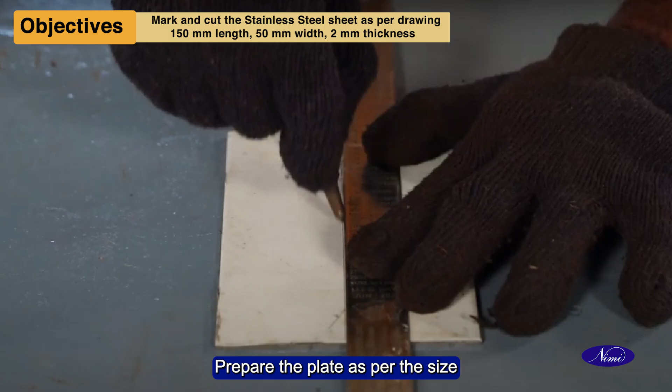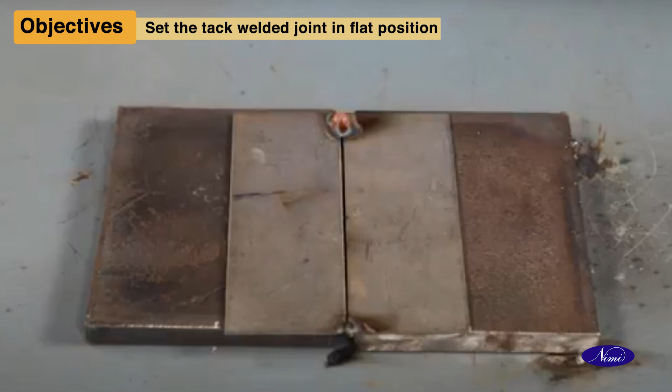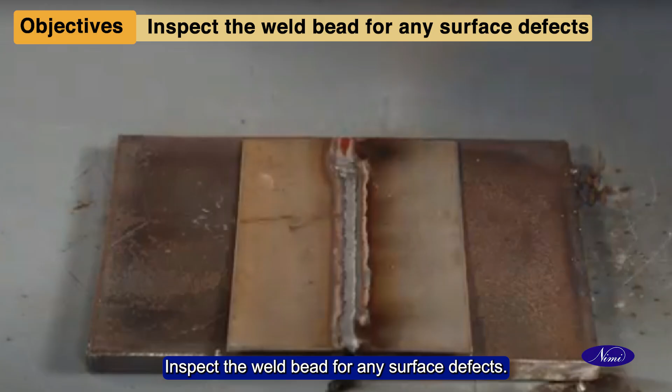At the end of this topic, you shall be able to prepare the plate as per the size 150 mm length, 50 mm width and 2 mm thickness. Set the tack welded joint in flat position. Deposit the bead with appropriate amount of filler metal. Clean the weld bead with a steel wire brush. Inspect the weld bead for any surface defects.

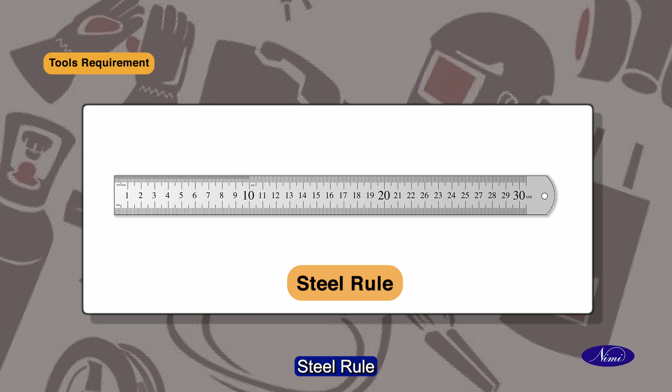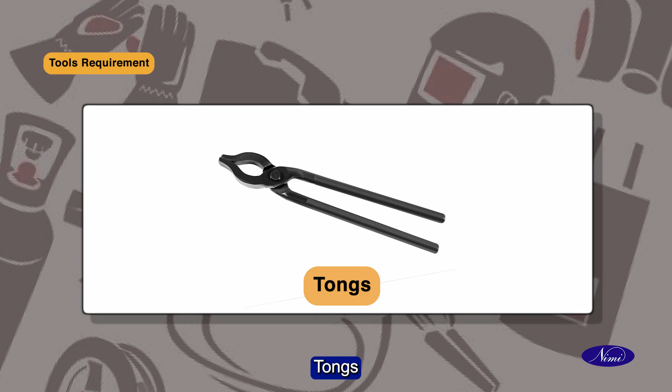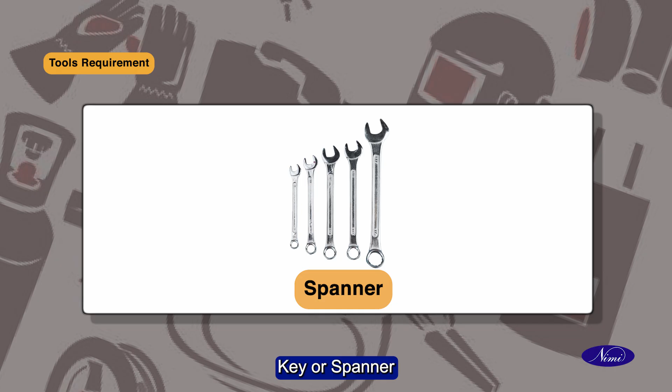Now let us look at the tools required for performing butt joint on stainless steel 2 mm thick sheet in flat position by dip transfer. Tools or materials required: steel rule, ball peen hammer, half round file, tri-square, tongs, chipping hammer, steel wire brush, personal safety equipment, key or spanner, helmet type screen, angle grinder, gas regulator

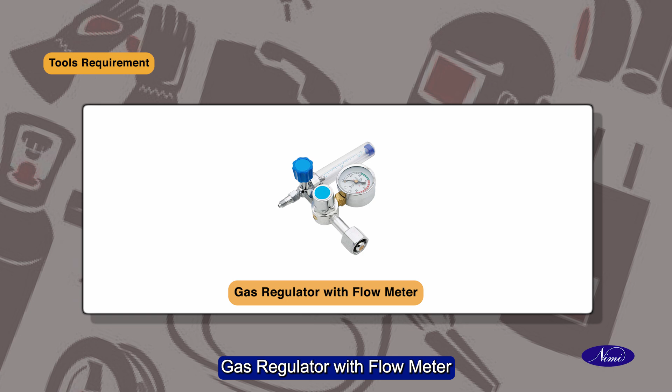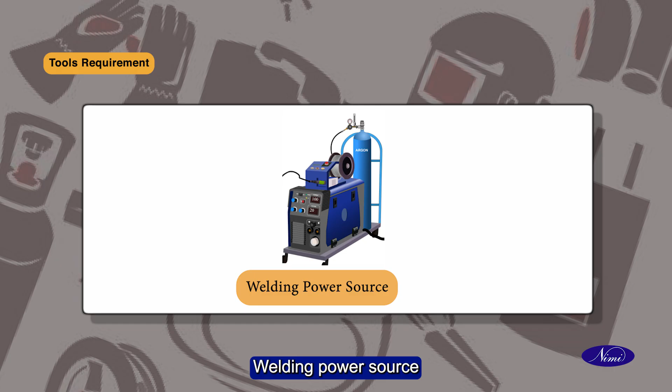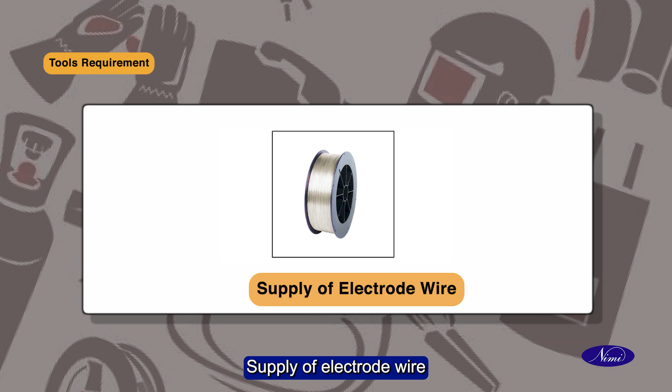with flow meter, CO2 gas heater, shielding gas hoses, welding power source, wire feeders, supply of electrode wire, welding gun, shielding gas cylinder, argon gas, stainless steel sheet 2 mm thickness.

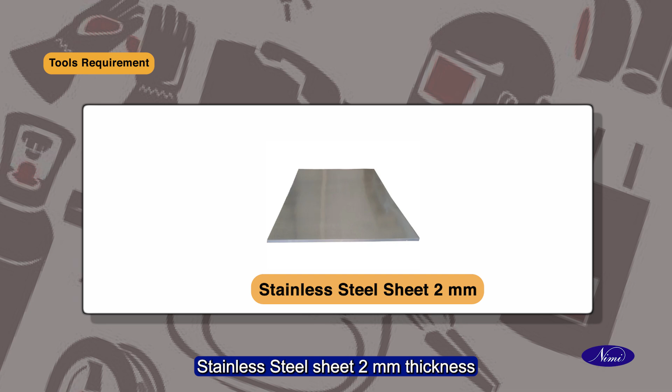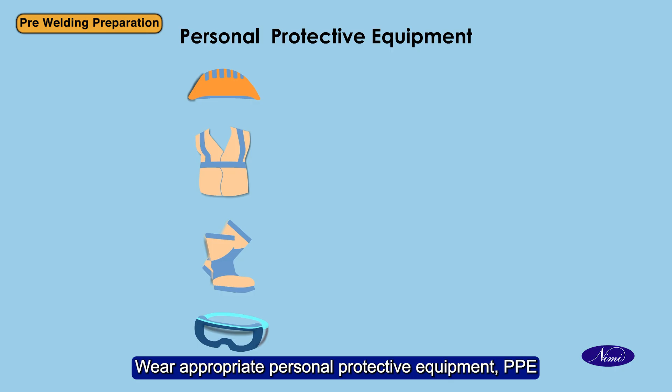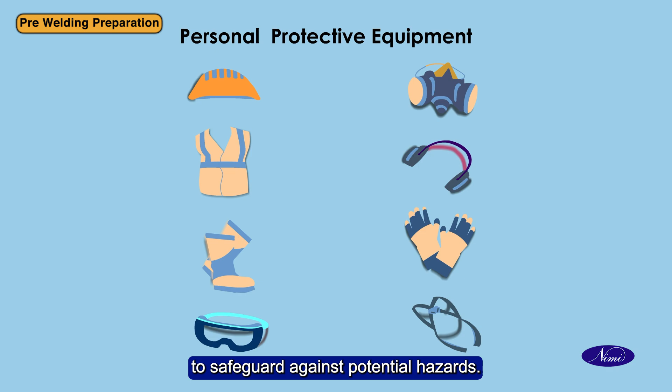Now let us look at the preparations for performing butt joint on stainless steel 2 mm thick sheet in flat position by dip transfer. Pre-welding preparation: wear appropriate personal protective equipment (PPE) such as safety goggles, gloves and ear protection to safeguard against potential hazards. Make sure you work in a place with good light and ventilation.

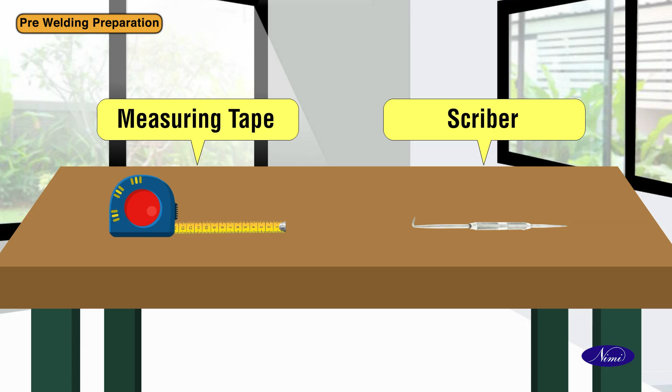Keep ready with ruler or measuring tape and scriber on the welding table for taking measurement for cutting. Use a ruler or measuring tape to mark the desired cutting line, 150 mm length, 50 mm width, accurately on the stainless steel sheet 2 mm thick.

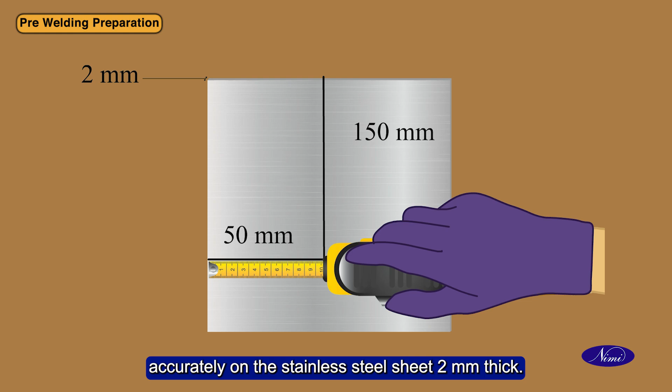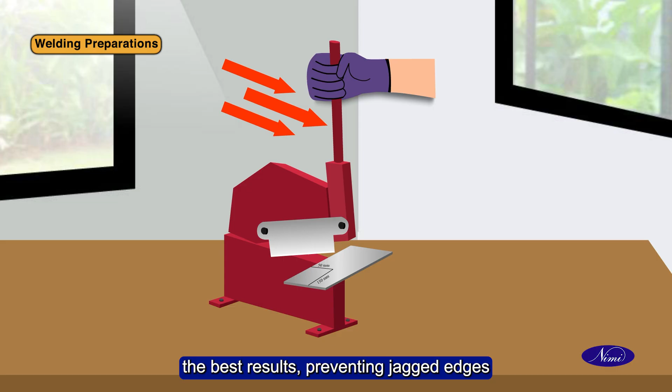Keep the hand shearing machine aligned with the marked cutting line as you continue to apply pressure. A slow and controlled cutting motion will yield the best results, preventing jagged edges and deformation of the sheet. Once the cutting process is nearing completion, pay extra attention to maintain the straightness of the cut.

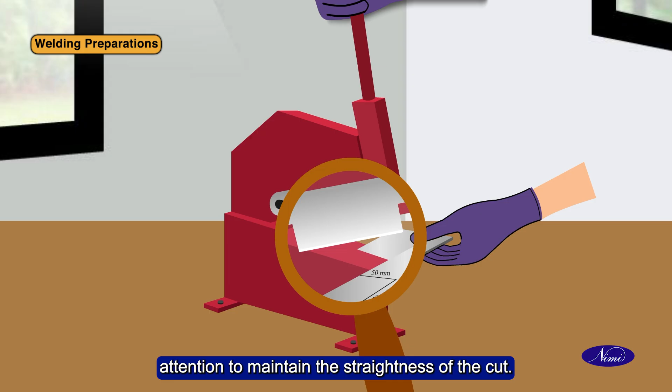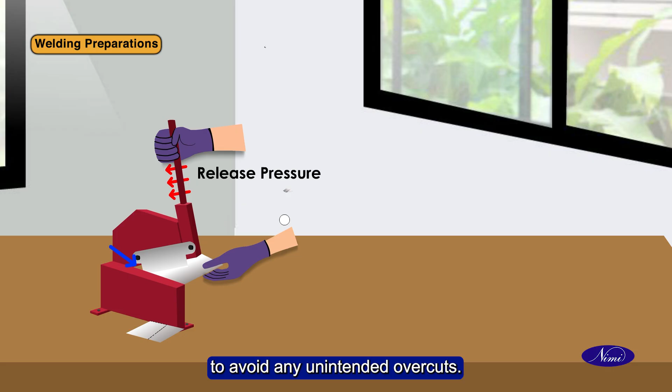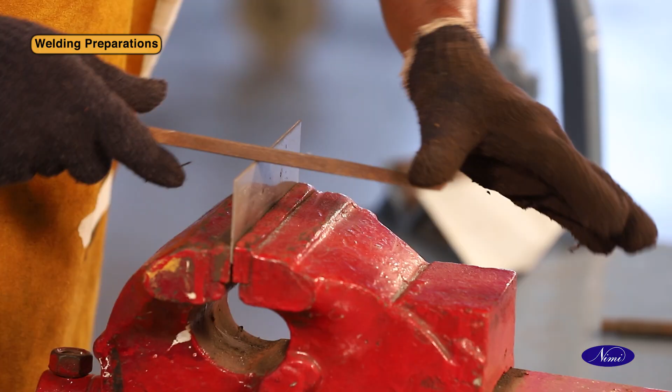Slow down as you approach the end of the line to avoid any unintended overcuts. After the cut is finished, carefully examine the edges of the stainless steel sheet. File the rough edges. Clean the job surface with a stainless steel wire brush.

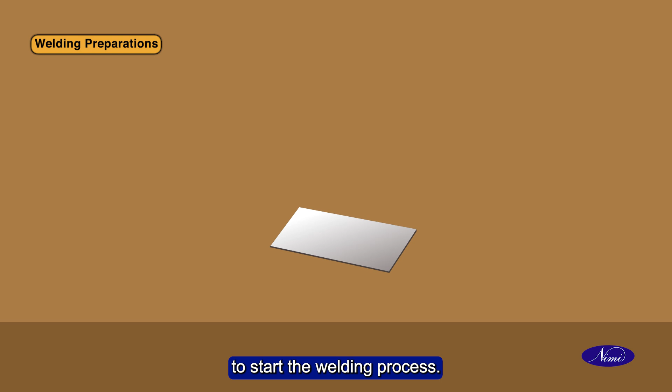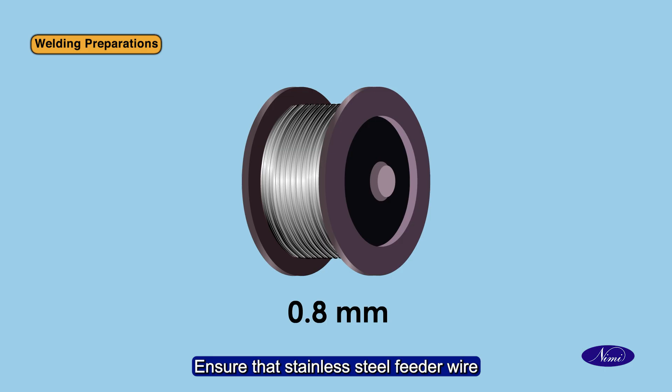Keep the sheet ready on the welding table to start the welding process. Start setting up of GMAW machine. Ensure that stainless steel feeder wire with correct diameter is taken.

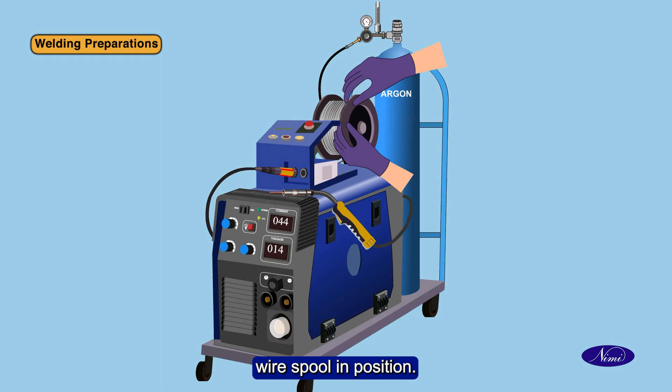Fix the 0.8 mm diameter stainless steel wire spool in position. Lock it up and pull the wire through the guide tube, rollers, spiral and contact tip of the torch. Ensure that argon gas cylinder is fitted with flow meter.

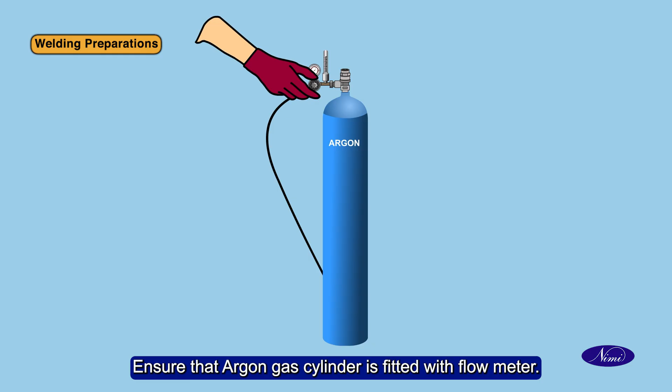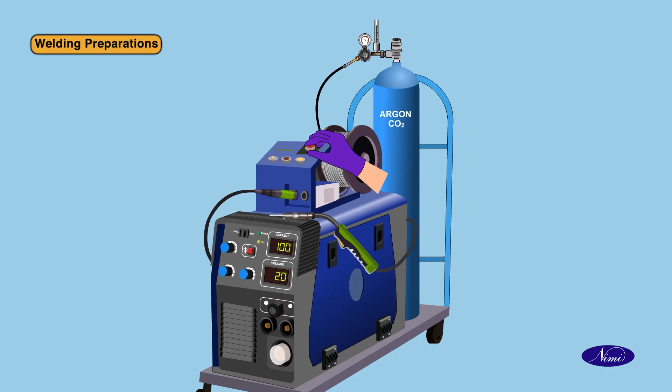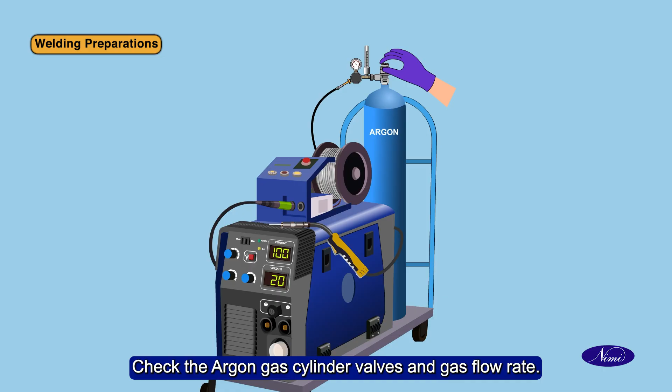Check the machine setup before starting the welding. First, check the power supply of the GMAW machine. Check the argon gas cylinder valve and gas flow rate. Check the feeder wire machine for the correct speed.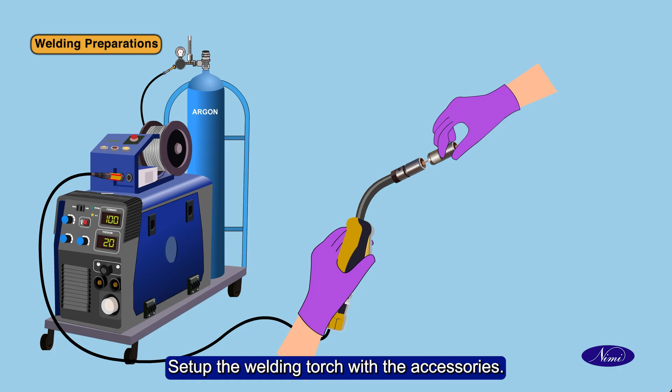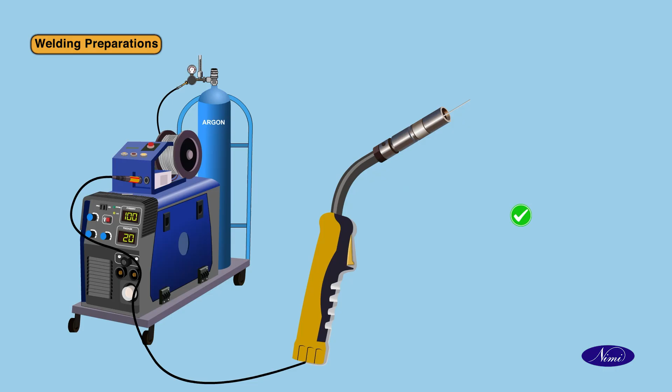Set up the welding torch with the accessories. Check the filler wire feeder on the welding torch. Ensure that the GMAW machine is working fine.

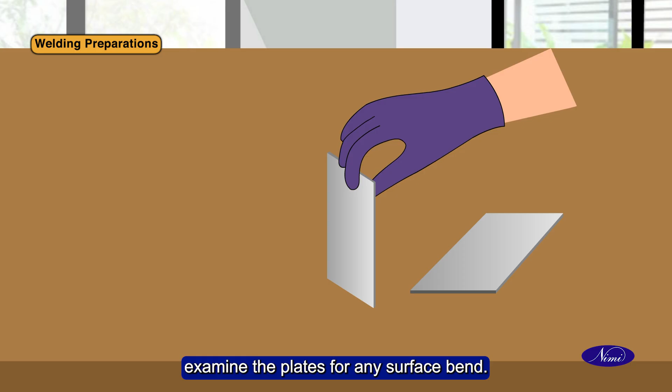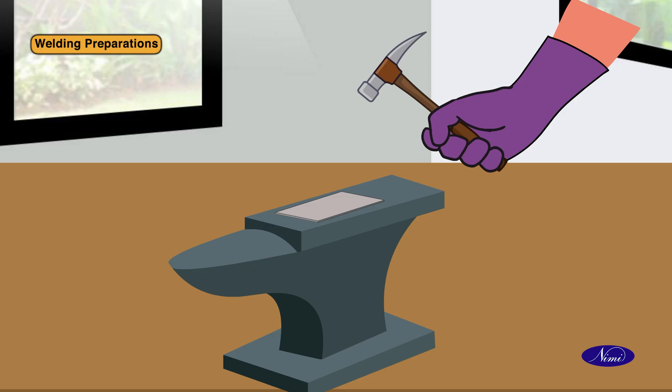Before setting sheets as square butt joint, examine the plates for any surface bend. If any bend is observed, then straighten the cut pieces by hammering on an anvil. Once again, check the surface and proceed for the setting process.

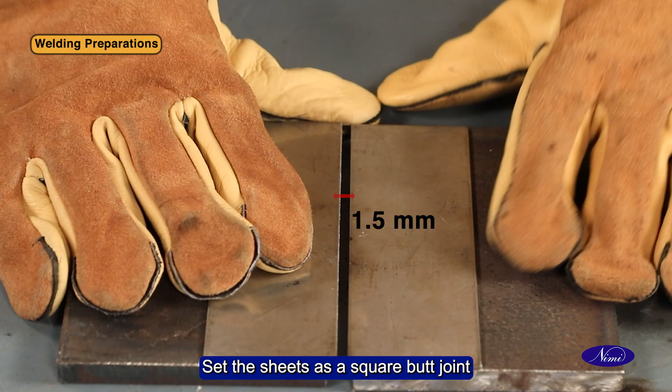Set the sheets as a square butt joint with 1.5 mm root gap. Tack weld the sheets at either end of the sheet.

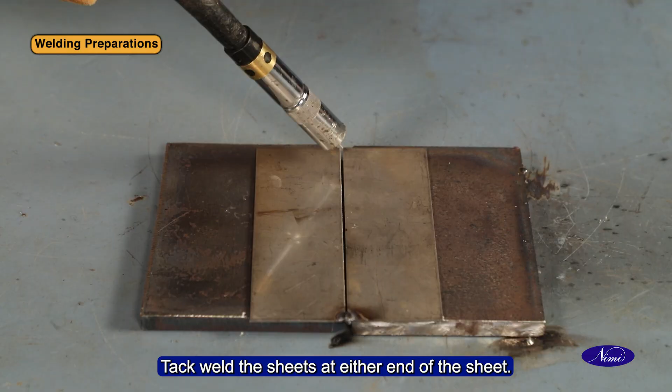Now let us see the welding process for performing butt joint on stainless steel 2 mm thick sheet in flat position by dip transfer.

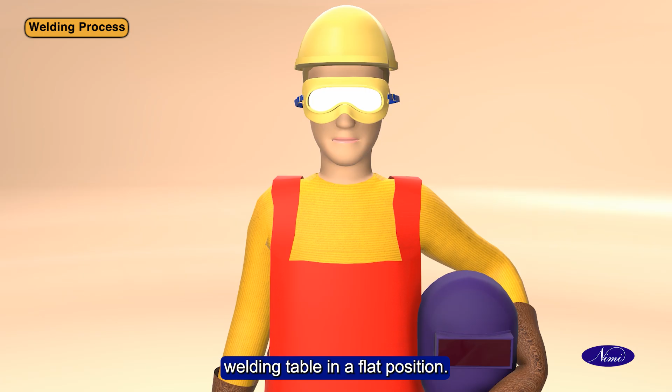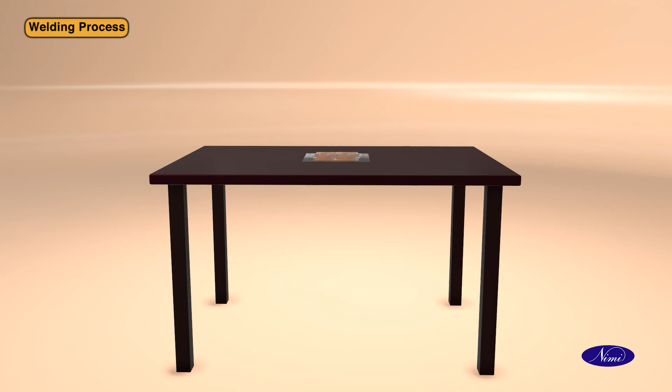Wear appropriate personal protective equipment (PPE) such as safety goggles, gloves, and ear protection to safeguard against potential hazards. Set the tack welded workpiece on the welding table in a flat position. Fix the tack welded workpiece on the backing strip in a flat position.

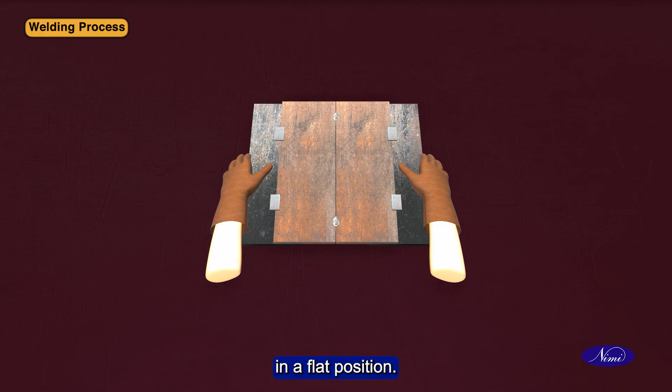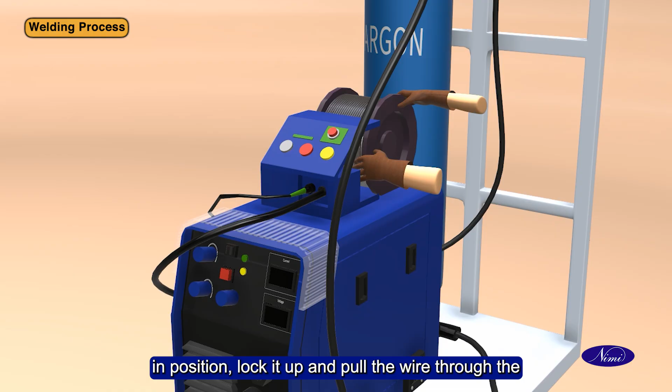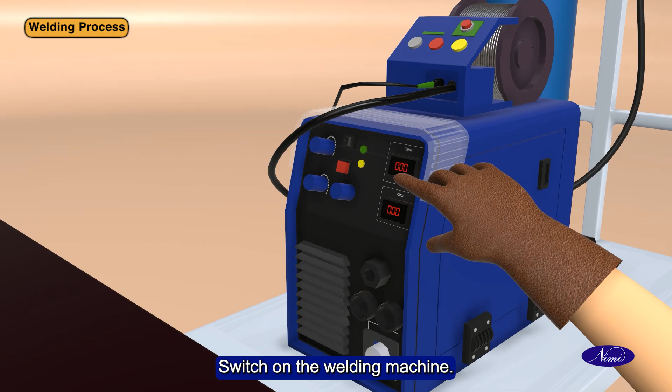Fix the 0.8 mm diameter stainless steel wire spool in position, lock it up and pull the wire through the guide tube, rollers, spiral and contact tip of the torch. Switch on the welding machine.

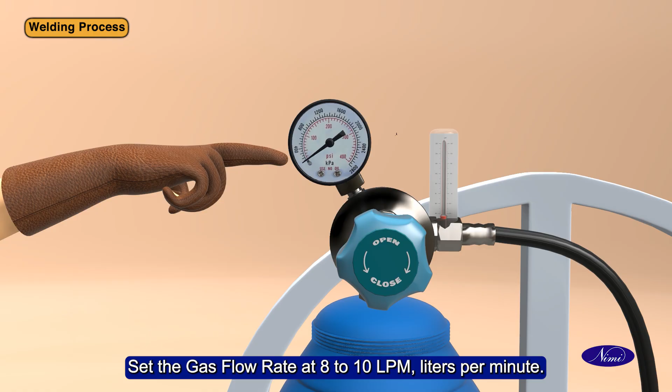First, check gas flow while starting the welding. Adjust the gas flow according to the specified flow rate. Set the gas flow rate at 8 to 10 lpm, liters per minute.

See the flow rate in the flow rate tube next to the opening valve of the cylinder. Ensure that the flow rate is correctly set for the welding process.

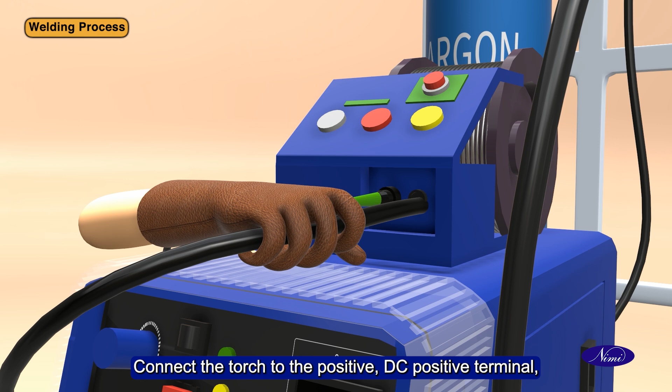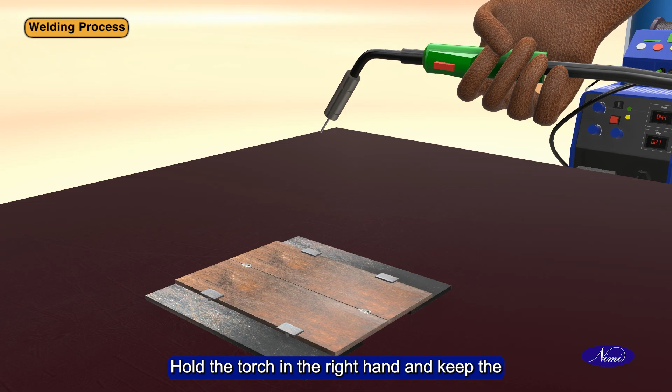Connect the torch to the positive, DC positive terminal (DCRP) of the machine. Keep the welding torch in the ready position. Hold the torch in the right hand and keep the index finger on the press button of the welding torch.

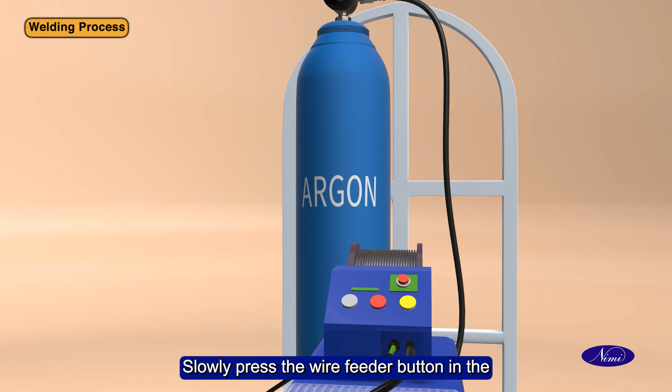Slowly press the wire feeder button in the welding torch and check if the wire is coming out at a constant speed.

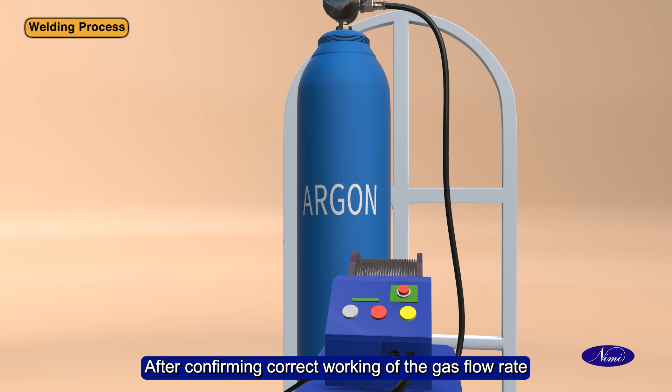After confirming correct working of the gas flow rate and wire feeder rate of the machine, we have to start setting the voltage for the welding process.

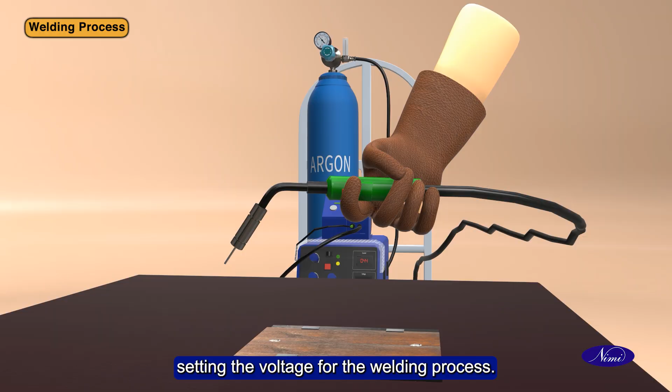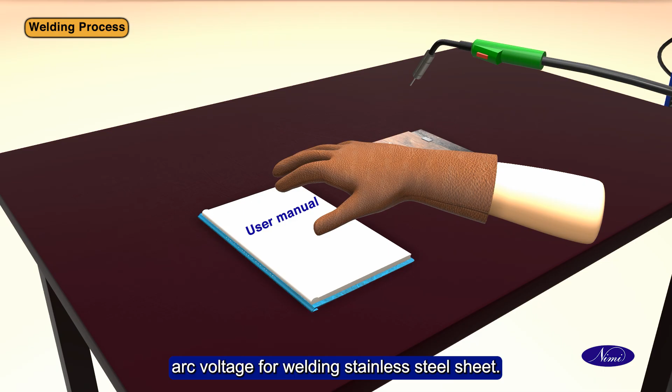Before setting the arc voltage, it is better to see the guidelines or user manual for setting arc voltage for welding stainless steel sheet. Same procedure is to be followed for setting the ampere. See the guidelines or user manual for setting ampere for welding stainless steel sheet.

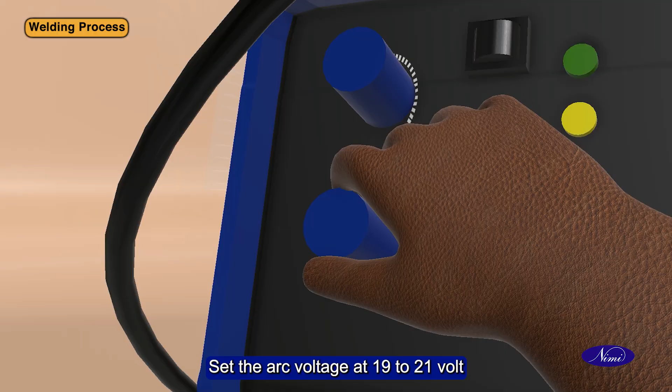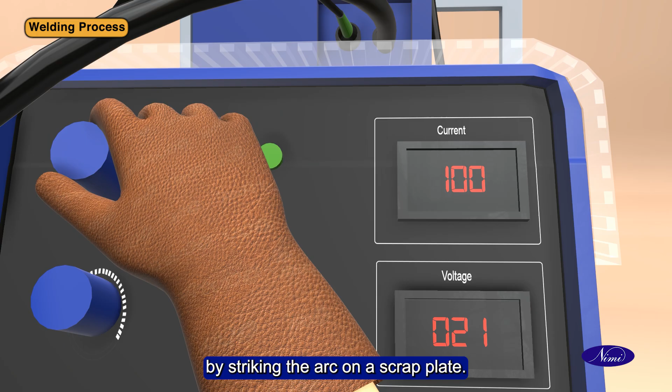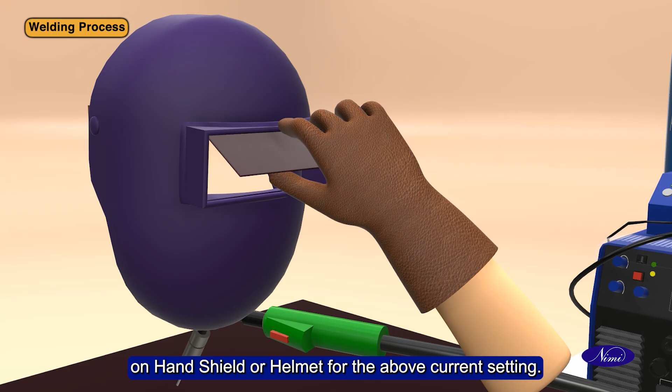Set the arc voltage at 19 to 21 volts as required for dip transfer mode. Set the wire feed rate so as to get 90 to 100 ampere by striking the arc on a scrap plate. Use DIN 11 or 12 black or green filter glass on hand shield or helmet for the above current setting.

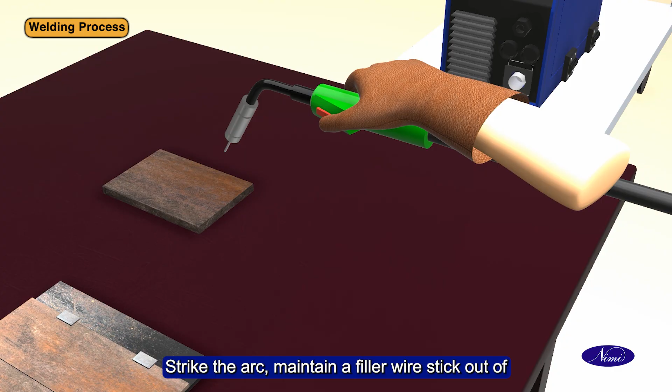Switch over to weld mode as indicated in the machine. Strike the arc, maintain a filler wire stick out of 8 to 10 mm from the end of the contact tip to the job as required for dip transfer mode.

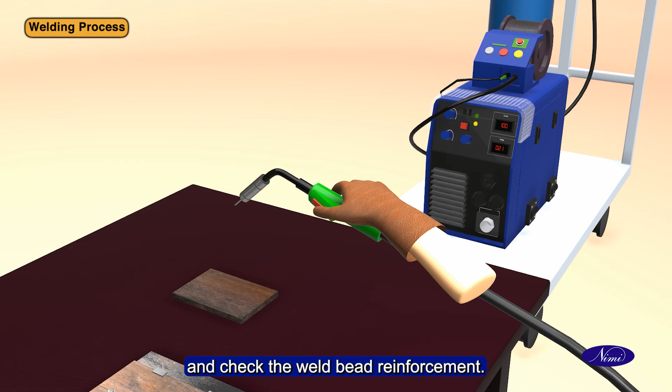Strike an arc on a sample sheet and check the weld bead reinforcement. Use proper torch angles with slight weaving motion. Deposit the bead on butt joint from one end to the other end.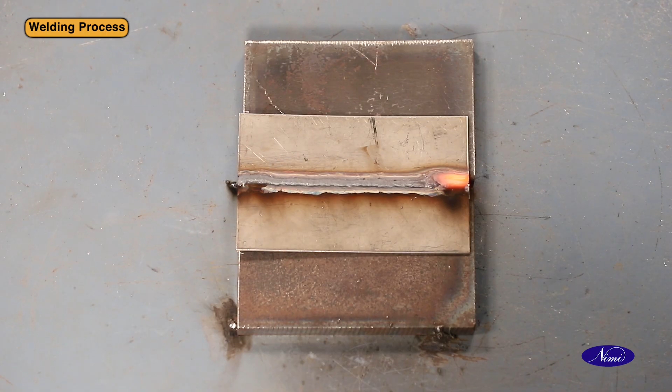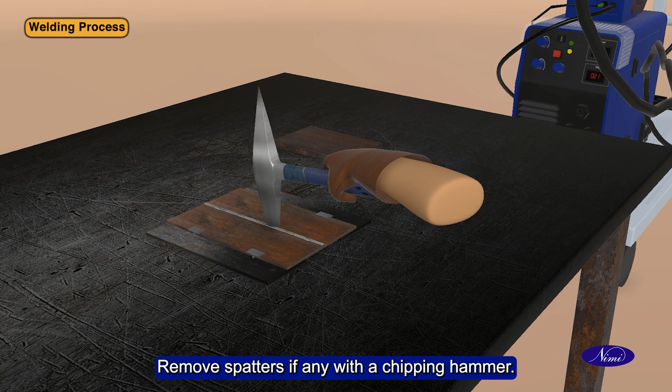Ensure for proper reinforcement of the weld bead. Remove spatters, if any, with a chipping hammer. Clean the joint using carbon steel wire brush. Inspect the weld bead for any surface defects.

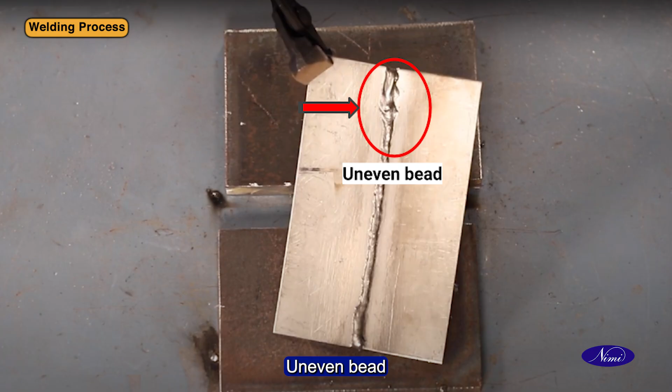Let us now see the defects: uneven bead, excess reinforcement, spatters, improper fusion, distortion.

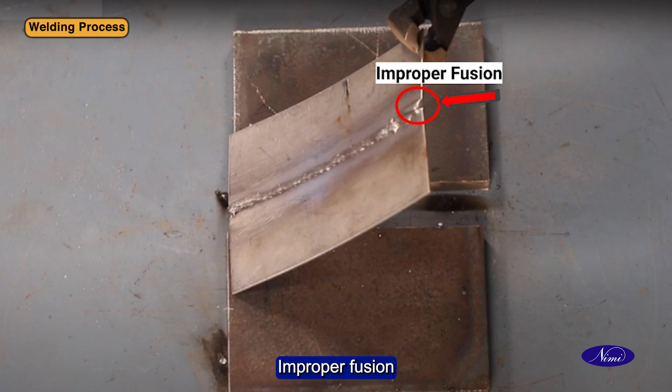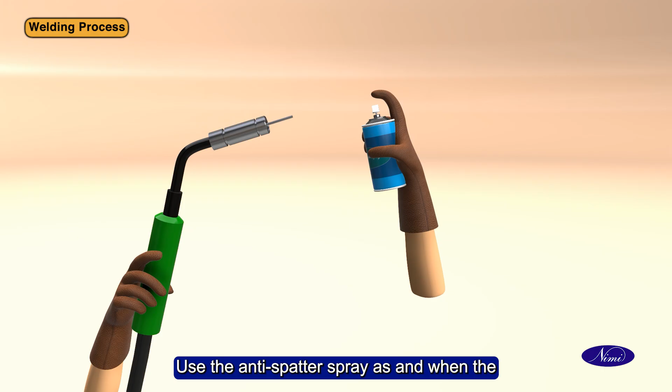Safety procedure to be followed by welders: use the anti-spatter spray as and when the torch nozzle gets clogged with weld spatters. Note that if this is not done, the wire feed may be irregular, causing an unestablished arc.

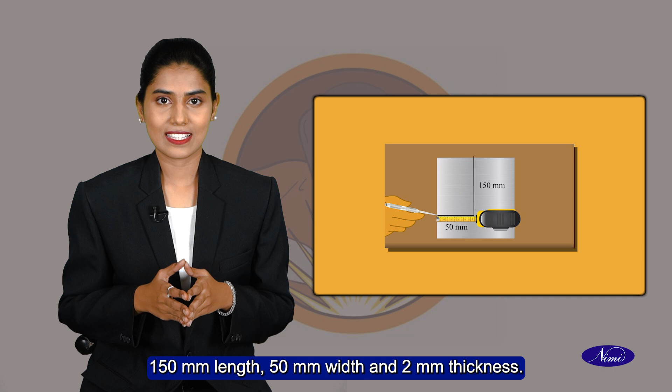Recap: at the end of this topic, you will be able to prepare the plates as per the size 150 mm length, 50 mm width and 2 mm thickness. Set the tack welded joint in flat position. Deposit the bead with appropriate amount of filler metal. Clean the weld bead with a steel wire brush. Inspect the weld bead for any surface defects.